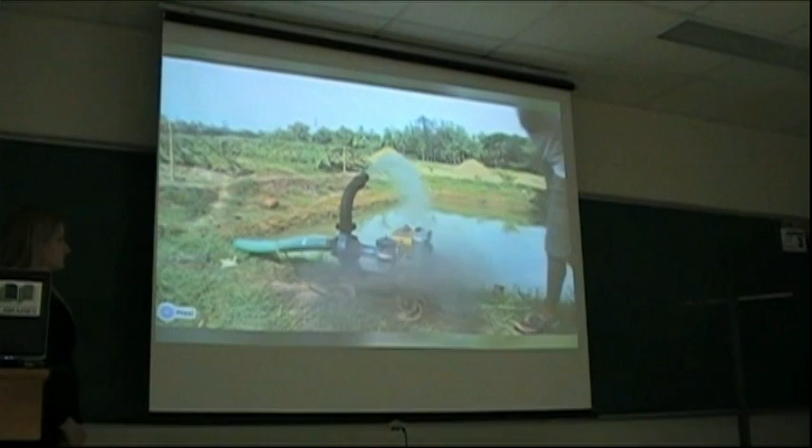Diesel pump is very expensive. The diesel pump pollutes a lot, it consumes a lot of diesel. A treadle pump is used for about 1,000 hours a year, and it saves up to half a ton of carbon dioxide.

As well as its environmental benefits, the treadle pump has had a huge impact on the rural poor. The reason they are poor is because they don't have access to irrigation. If you don't have access to water, you cannot farm. That is the difference between a rich and a poor farmer. Modern day technologies do not work for smallholder farmers.

Since winning the Ashden Award, IDEI and its founder, Amitabh Sadangi, have gone from strength to strength. To this day, we have sold 750,000 pumps. This means that it has improved the lives of between 3.5 and 4 million people. We call it the golden egg-laying goose.

Awards and investment have followed in quick succession: $27 million from the Bill and Melinda Gates Foundation, a major carbon finance deal from Climate Care, and a $1 million investment from the Acumen Fund to help sell treadle pumps and drip irrigation systems around the world.

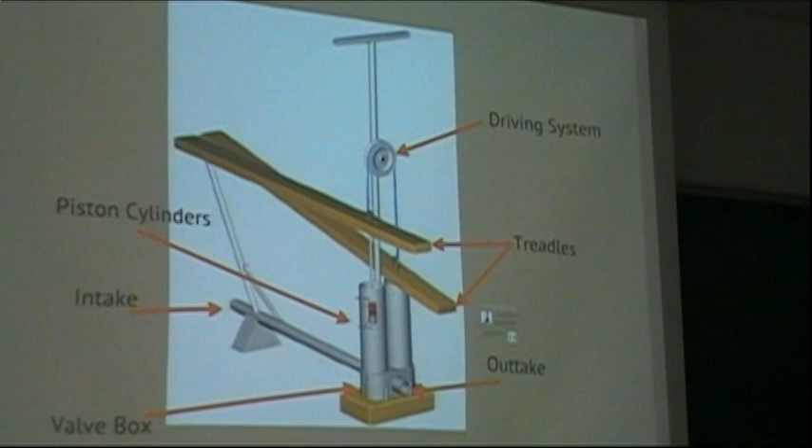Alright, let's look at the treadle pump design. When we started looking at it, we found it was composed of about 7 main components. The first is the driving system, usually made up of a rocker arm or pulley system, used to drive the piston cylinder arrangement. It has treadles, which the user steps on, kind of like a Stairmaster to operate it, plus an intake and outtake for the water source.

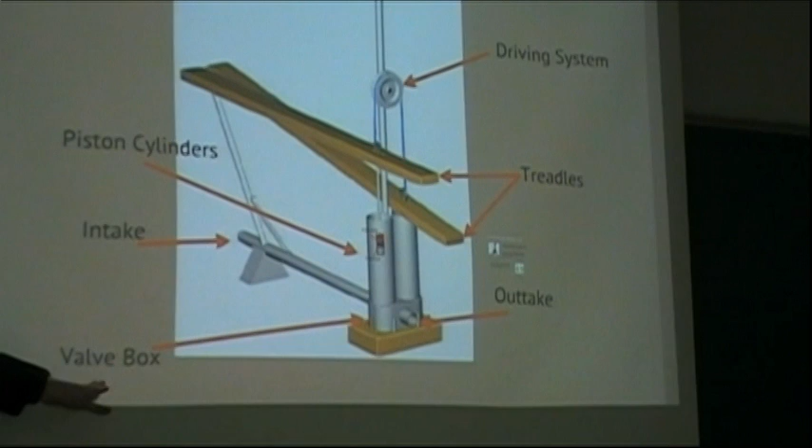We have a valve box here - some sort of valving system, doesn't have to be a box, but some system preventing the backflow of water so the pump can work efficiently. Inside the piston cylinder, you have your piston shaft, which connects to the drive system, and your piston seal, which actually creates the suction within the cylinder.

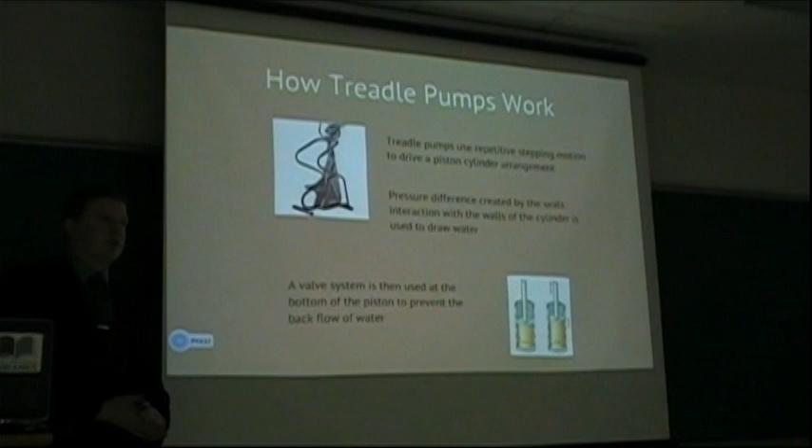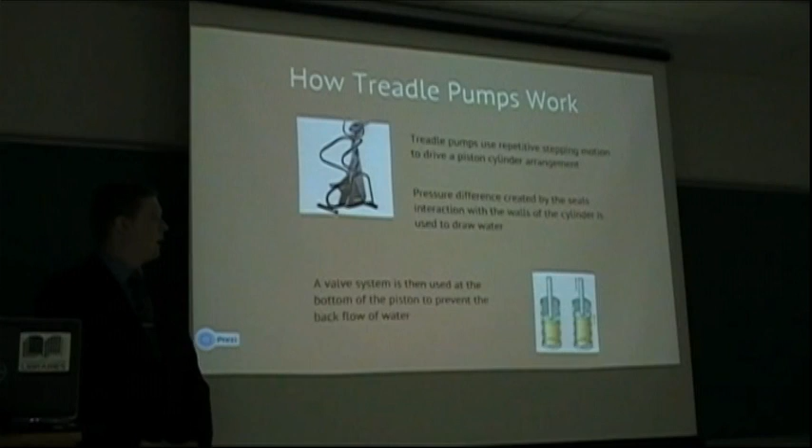So basically, treadle pumps work very similar to a Stairmaster. They use repetitive up and down motion to create suction between the seal and the cylinder wall. This pressure difference allows you to pull water from the ground up to 7 meters. As mentioned, a valve system is typically used in treadle pumps to prevent the backflow of water, so you're not doing redundant work pulling water up just to push it back down with the next treadle.

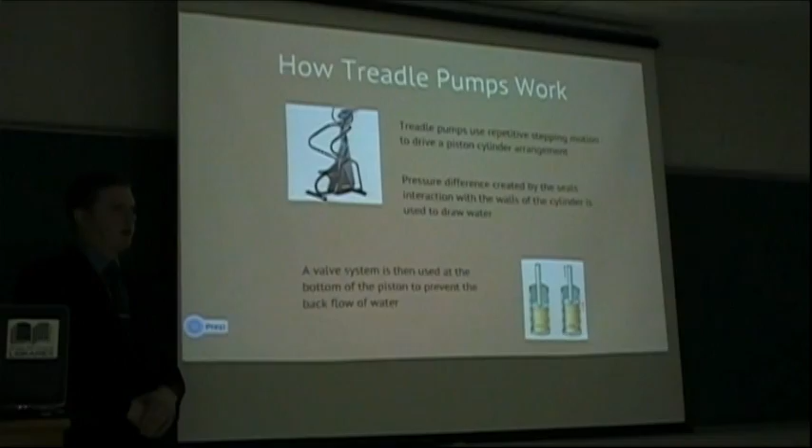Okay, so an important part of our project was our benchmarking study. The objective of our benchmarking is to find and implement some good ideas that we can use to improve our prototype performance.

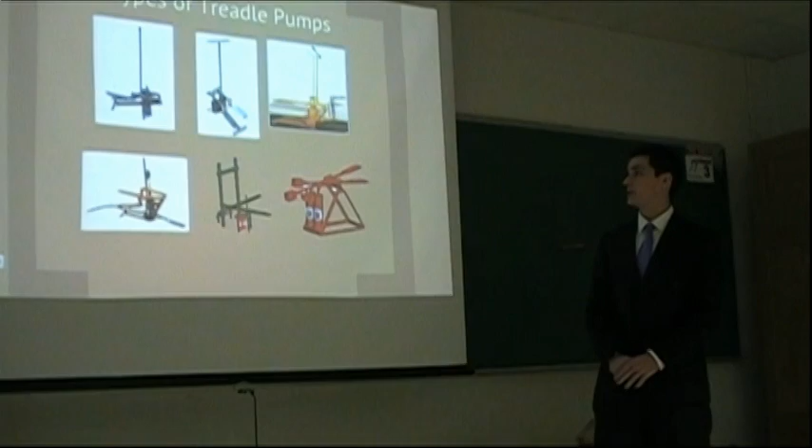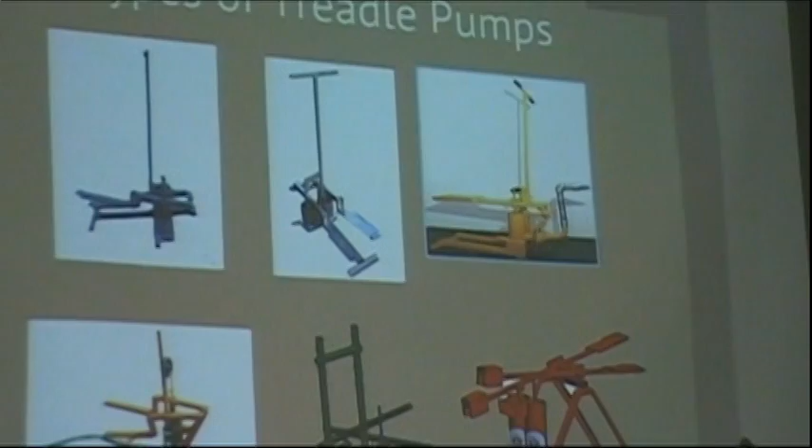So here we have some pictures of the different types of treadle pumps we looked at for our benchmarking. The first one is called the Super Moneymaker. It's produced by a company called Kickstart. The two next ones are different designs of treadle pumps. This one actually uses a pulley to drive the system.

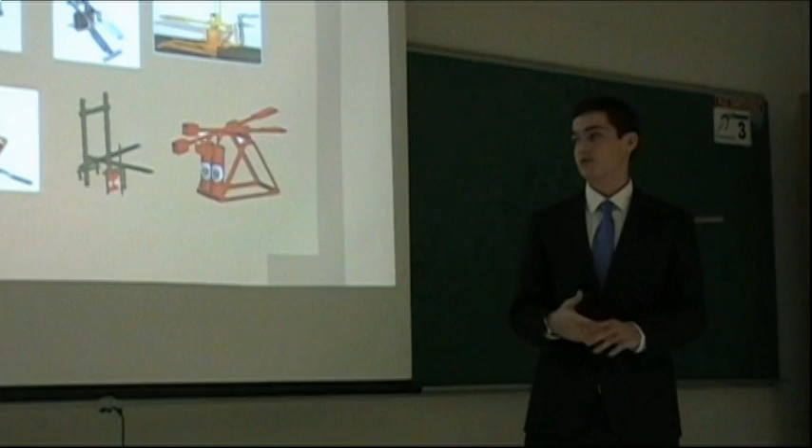This one is actually the one that you saw in the video. People can actually buy the pump itself and build the frame with any available material like bamboo or something like that. And this one is just another example of a different design of treadle pump without the handlebar.

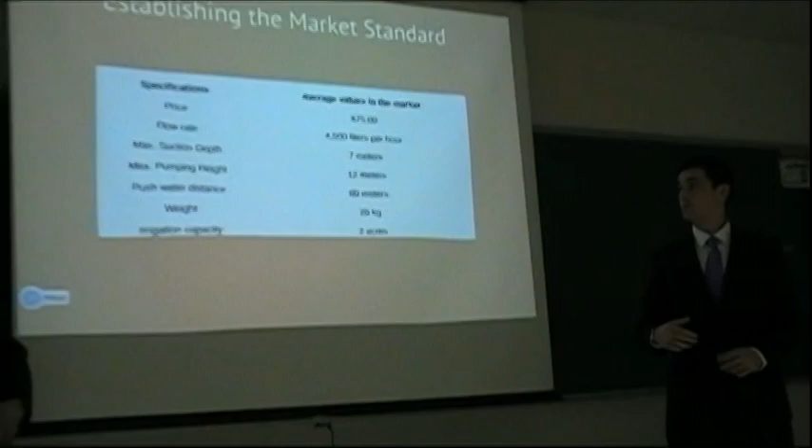So with that benchmarking data, we have this table here showing the main specifications of a treadle pump and the average values in the market.

So you can see that a treadle pump has an average price of $75, and an average flow rate of 4,500 liters per hour, which is about 20 gallons a minute. They have an average weight of 20 kilograms, that is about 44 pounds, and irrigation capacity of 2 acres.

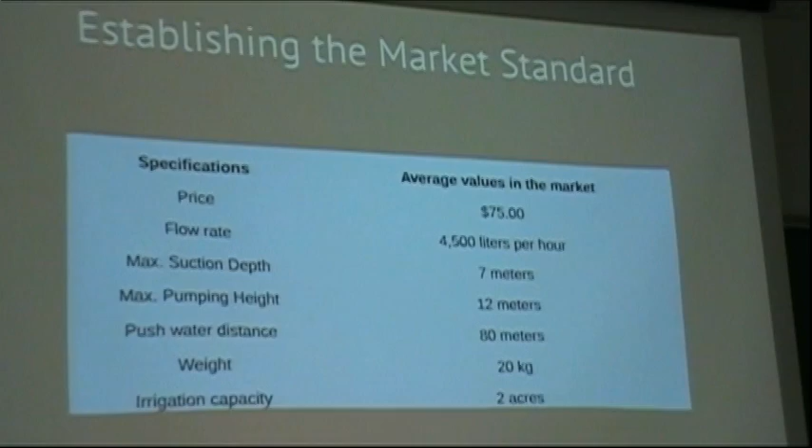This data was important for us because then you can compare our results with what they have in the market today.

So now I'd like to introduce you to our actual project. For this project, we partnered with the Appropriate Technology Collaborative. They're a non-government organization, and their goal is to produce sustainable technology that will give people in developing countries the chance for socioeconomic growth. They actually already had a pre-existing ATC design that was produced by a student group a couple years ago, and their main request for this was for us to bring this closer to the market standard that Felipe talked about earlier.

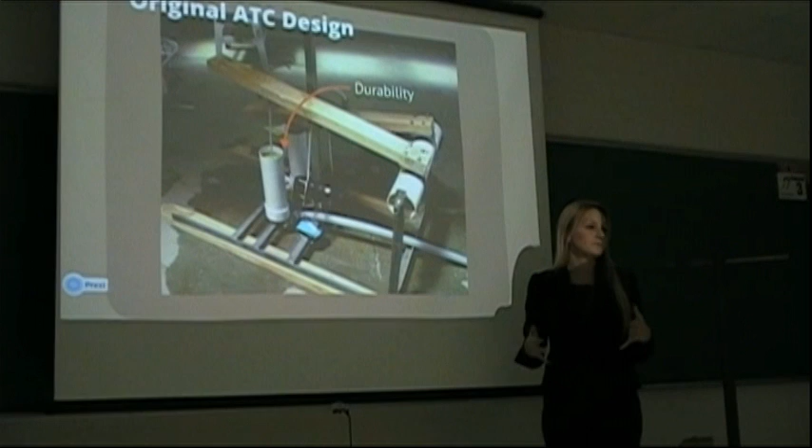Some main components they wanted us to improve is the durability. The durability is really important for a treadle pump, especially since we learned that maintenance in a lot of developing countries is not done. So if a pump breaks, most likely it'll be discarded and is no longer useful.

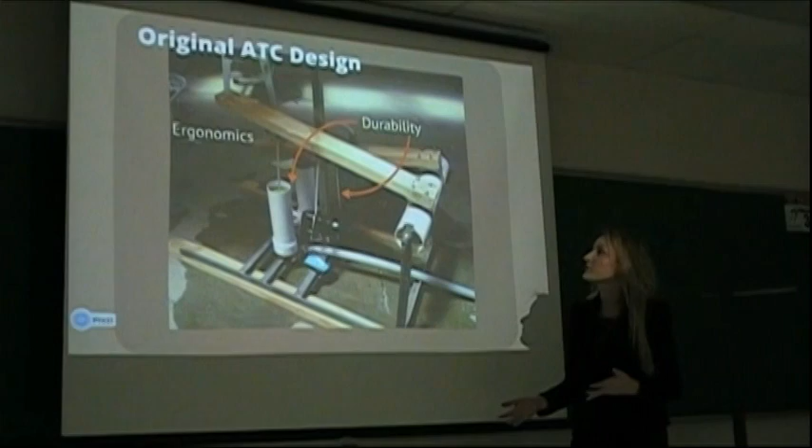Also, if a pump breaks, they can't afford to replace it. It's a pretty big investment for them living on $1 a day. Durability can be affected by replacing the PVC and also by looking into these wooden rocker arms.

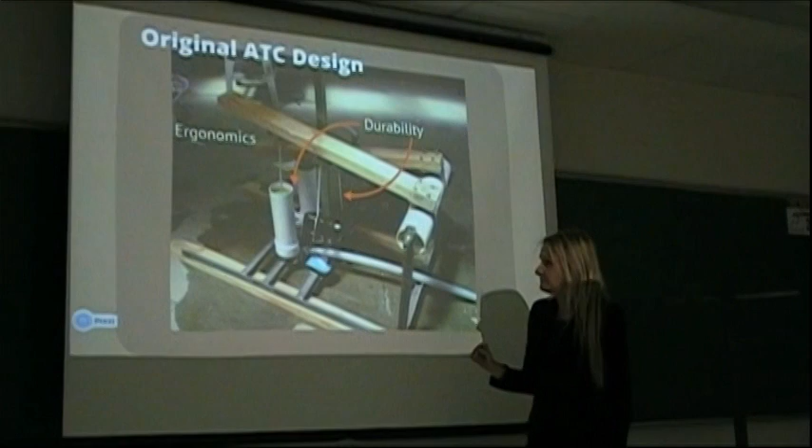Those aren't very strong. They then asked us to look at the ergonomics of their pump design. As you can see in this picture, and then also in this physical model that we have, the height that the operator would have to be is about 3 feet off the ground, which is not very safe and it's kind of awkward for them to operate.

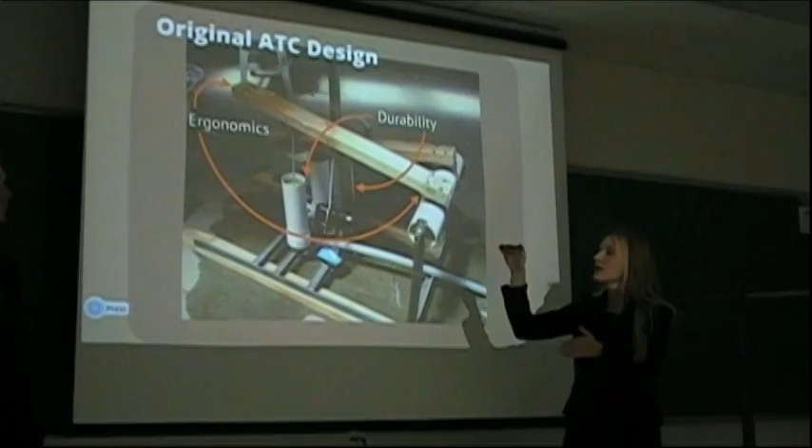Also, the connection to the pivot system isn't quite tight enough to make those treadles purely go up and down. There's some side-to-side movement, which also interferes with their operation of the pump.

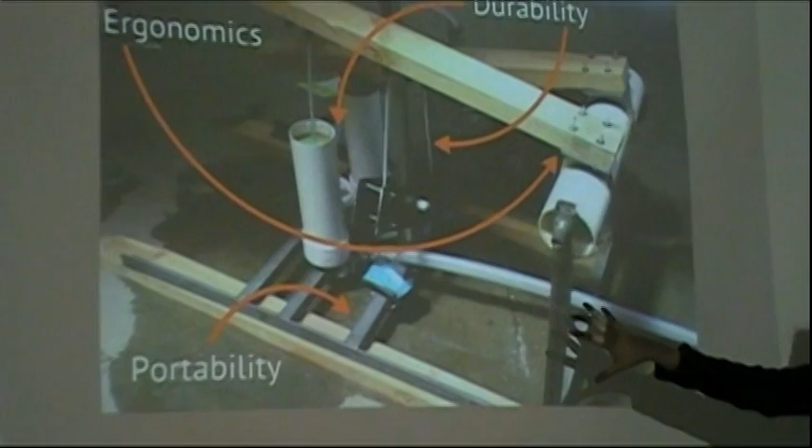They also asked us to improve the portability. As you can see, the current frame is made out of steel, and it's one big size that you can't break down. It's set to this size, and you couldn't imagine putting that on somebody's back and carrying it to a different field or bringing it from a main city into the field that you want to use it.

And lastly, they wanted our pump to be buildable in developing countries.

So, using what they gave us, we built a list of key design specifications. As you can see, these encompass the ideas that they had wanted us to address.

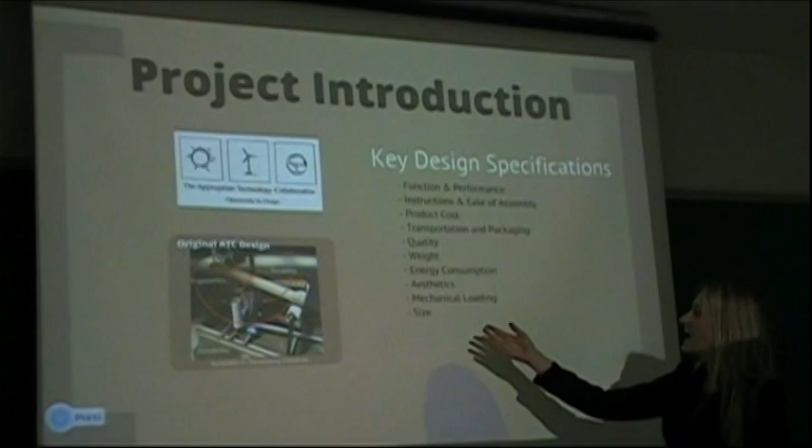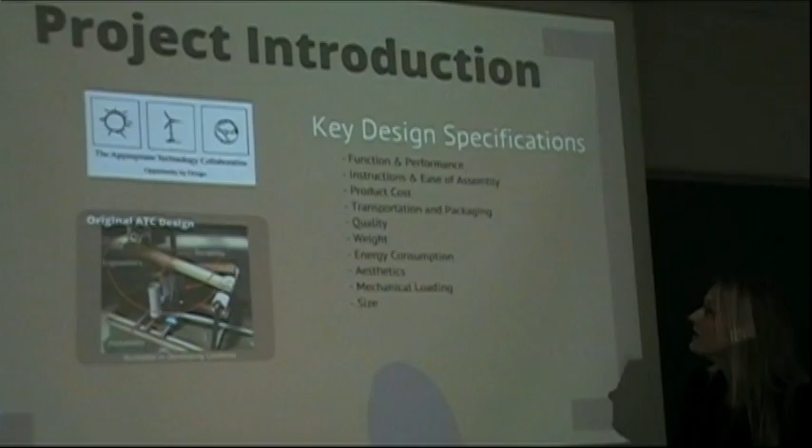Size and weight obviously will affect the portability. Things such as energy consumption, aesthetics, and mechanical loading are all factors that relate to the usage of the consumer. And then function, performance, and quality also relate back to the durability.

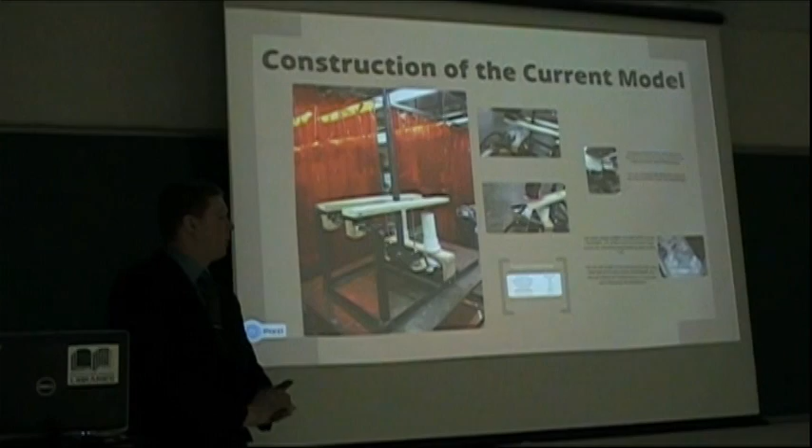So we decided it'd be useful to actually construct this model that was already previously existing. As you can see, it's up here in the front of the room, and you'll have a chance later to come up and take a good look at it. But we have some interesting video of myself working the pump.

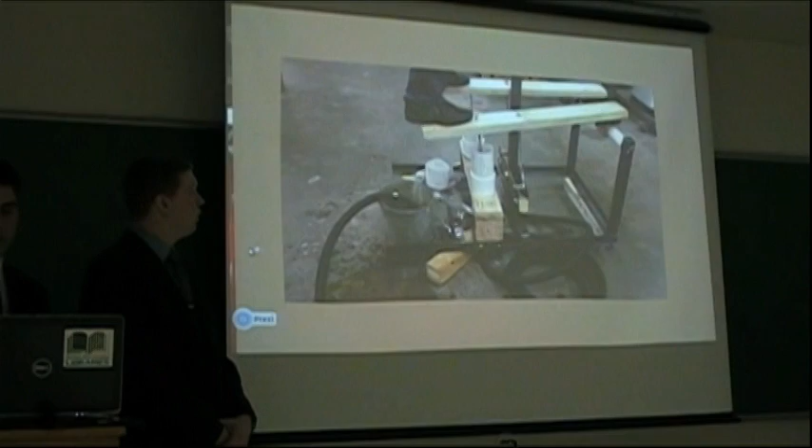As you can see, I'm pretty high in the air, about 3 feet, like Ann said, and I can operate it pretty smoothly. It draws some water, but not a whole lot, partially due to the valve system that was used. It's kind of hunched over the handle at the top, so it's not the most comfortable thing to use. It gets water pumping, but it could be improved on.

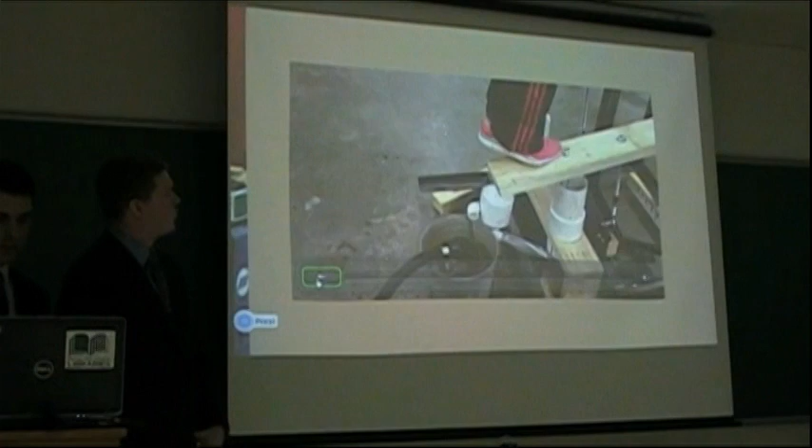So we have another video here, a little bit more interesting. This is Ann trying to pump the pump, and as you can see, it's very difficult for her to get it moving. Ann's a lot more realistic to what the demographic and population in India is going to look like as far as size. So if it's this hard for Ann to use it, it's going to be unrealistic and hard for people elsewhere to use as well.

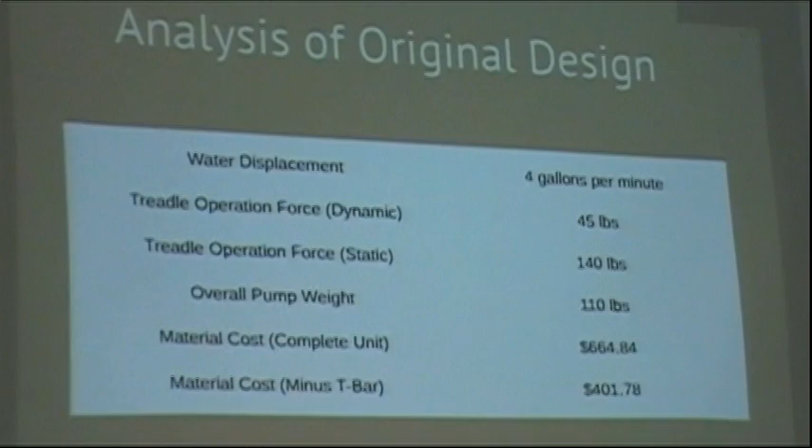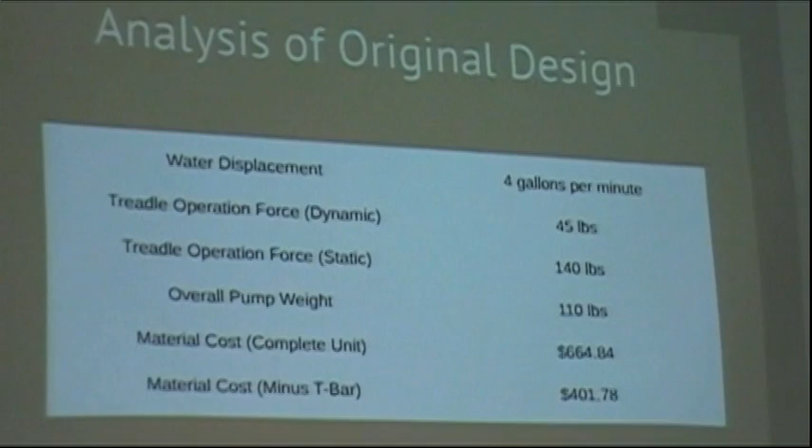Here's some analysis of the original design we took. It moved about 4 gallons per minute, and that was not pumping any water upward or pulling any water, just cycling water at ground level at about 4 gallons per minute. It took about 140 pounds to get the treadle operating from its static position, and once it was moving, it was more like 45 pounds. That initial 140 pounds to get it moving is more than a lot of people in India even weigh. Obviously it's very heavy, and it was extremely costly to build.

So kind of building off what both Ann and John talked about, we really wanted to concentrate on DFM after constructing this model. In the booklet we used to construct it, there were a couple of steps that were just missing. We were able to figure those out and go from there. Specifically, that had to do with fasteners—we wanted to reduce the number of fasteners in the design to make it as minimal as possible, as well as the ergonomics that they both touched on.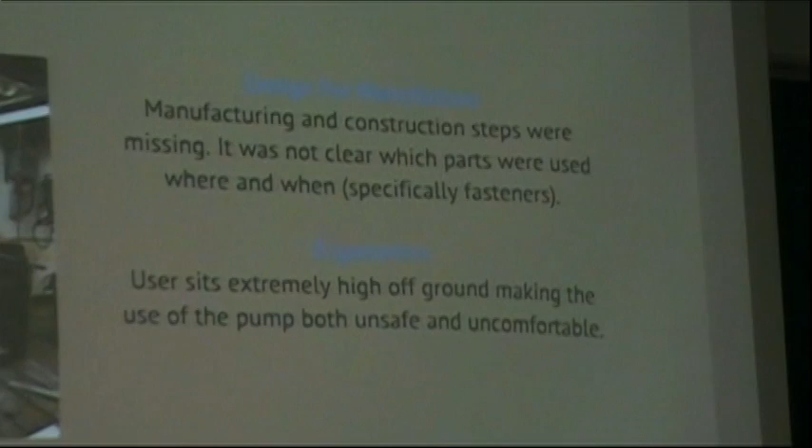You're very high up while operating this, which leads into safety concerns as well as just how comfortable you are while using the product. As a consumer, you want to feel comfortable using your product that you're going to be using for hours on hours on hours.

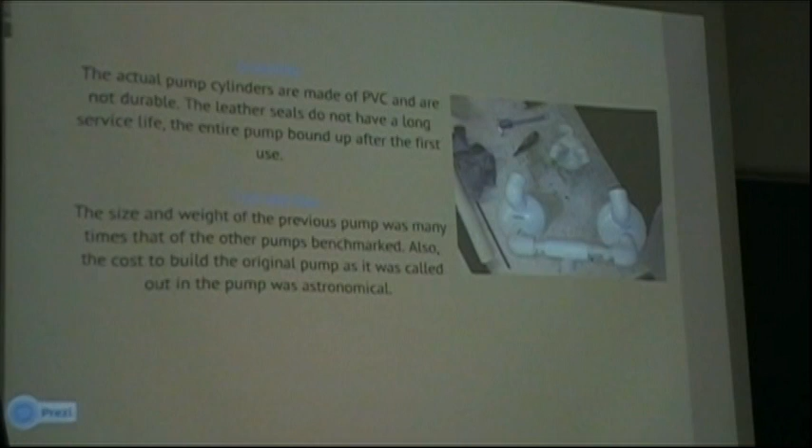As well as the durability—we found that PVC was not the strongest material, had a lot of flex to it. We felt it wouldn't really last too long out in the field in the elements. John also talked about the cost, which was based on American prices at your local Home Depot. That's going to be much greater than prices you'd see in foreign countries, as long as you're even able to buy the necessary materials there.

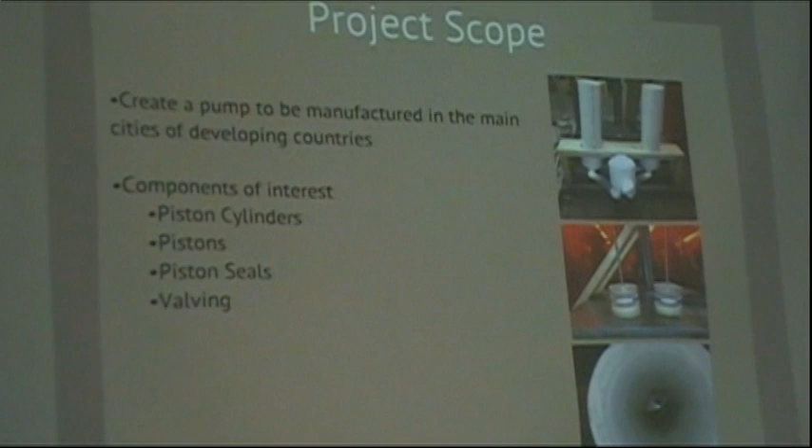So with the experience we got by building the original design, we went to our design phase. Our project scope began by defining two different topics. The first is to create a pump to be manufactured in the main cities of developing countries like India or Guatemala, for example. After our meetings with ATC and during the course of our project, we found that the areas we wanted to improve were the cylinders, pistons, piston seals, and the valving.

You can see the pictures over here. The first picture shows the pump housing with the 2 cylinders and what we call the water chamber. In the second picture, you can see the pistons and the piston seals made of leather. And in the last picture, you can see the valve system in the bottom of the cylinder—basically a piece of rubber that allows the water to flow in just one direction.

So we'd like to take some time to walk you through our thought process when we were designing each of these components. We'll go ahead and start with the seals.

Seals looked at several different materials and types. As we mentioned, the ATC model used leather. Do you want to pass around that piece of leather for us real quick? That is the material they used to build their seals. You can tell it's pretty rigid, pretty thick. It's hard for us to acquire, and because of that, we'd also think it would be hard for people in developing countries to acquire. Some downsides to leather are its durability and its actual attainment.

The leather does have positives, such as a low coefficient of friction, and it swells when you add water to it. So it's often used as a seal material in a lot of pumps.

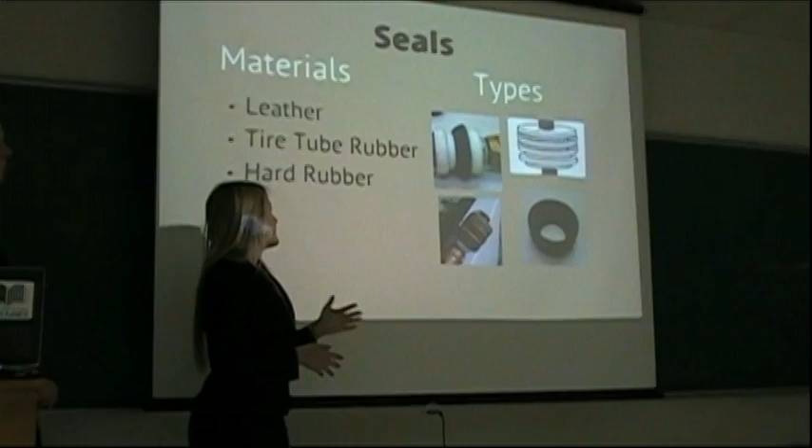We also looked at tire tube rubber. We found out that tires are incredibly available in a lot of developing countries, so we wanted to consider using that rubber in our seal. Finally we looked into hard rubber. Hard rubber would be nice because it's solid, and we think it would really help with the durability of the seals. The only drawback is that it has a higher coefficient of friction than leather.

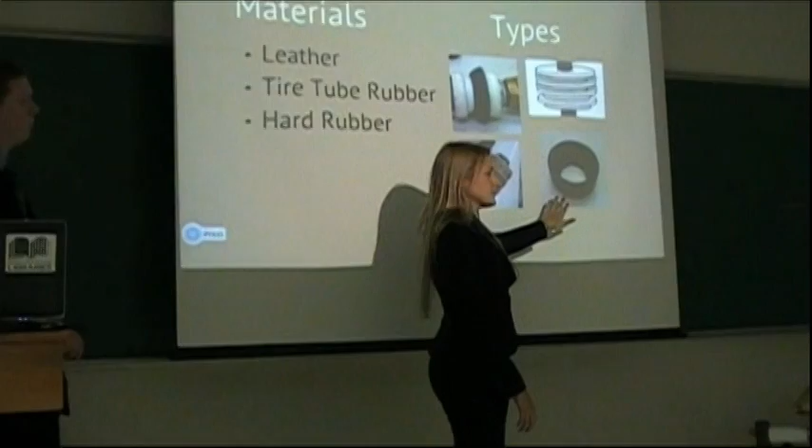Types of seals we looked at: U-seals, piston rings, labyrinth seals, and cup seals. Cup seals are what ATC used in the original model. Benefits of labyrinth seals and U-seals are that they're completely independent of friction to seal the pump—they depend more on flow and pressure drops. These two typically depend on friction.

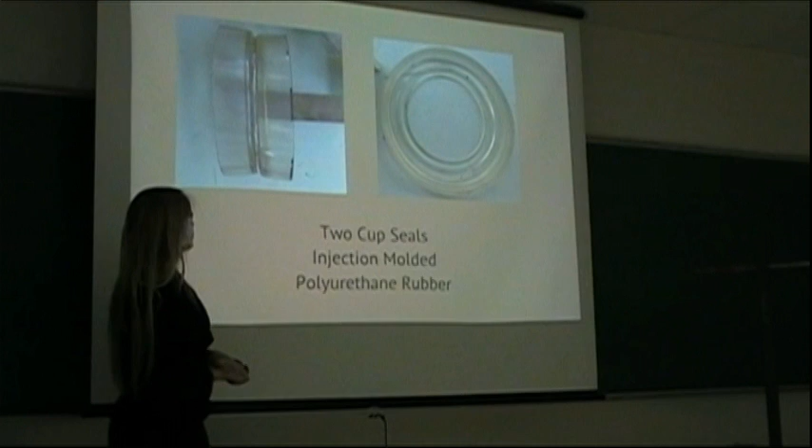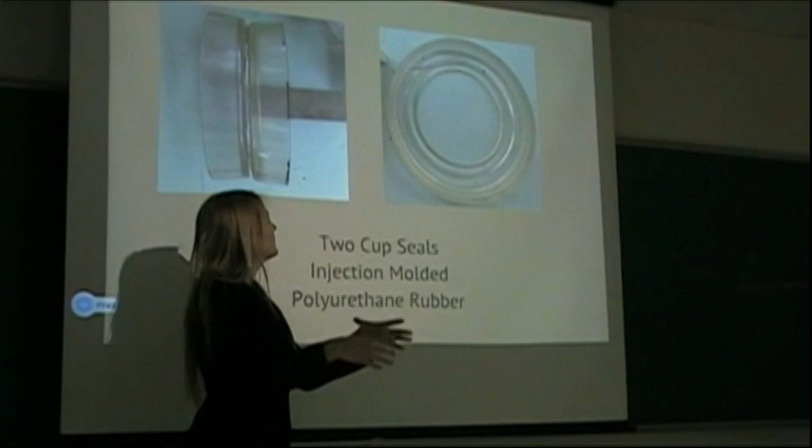We made a modification to the cup seal for our final design. We decided to use hard rubber, and made a 1 millimeter tolerance from that seal to the cylinder so it wouldn't rub against the sides and would flow freely. Because of this, we had to create a seal around that outside edge, so we had a small hole within the piston body that would allow some water to flow up, and that would in itself seal the seal.

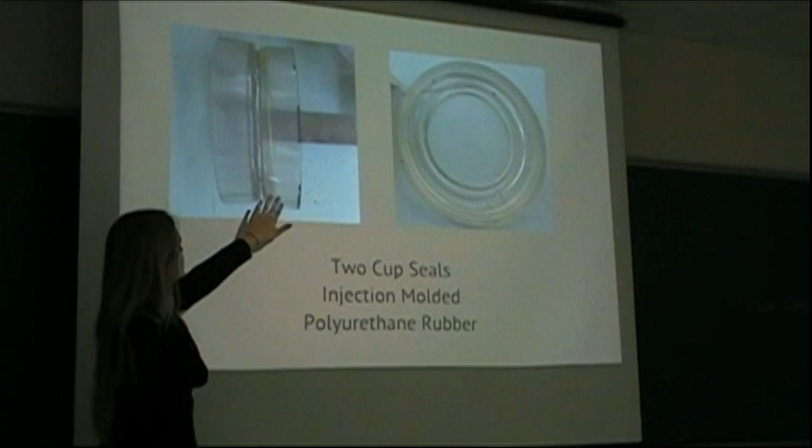So this is the basic two-seal configuration, which resembles what ATC had, except we stepped it up to using metal and rubber. The rubber would be injection molded polyurethane, and we know that injection molding is pretty available in main hubs of developing countries.

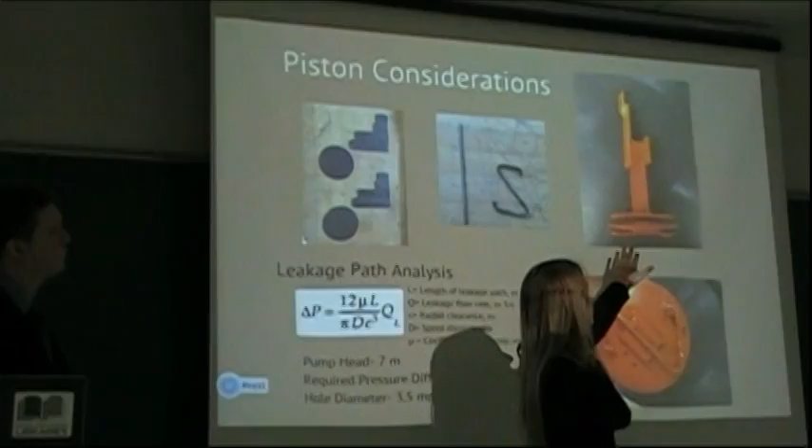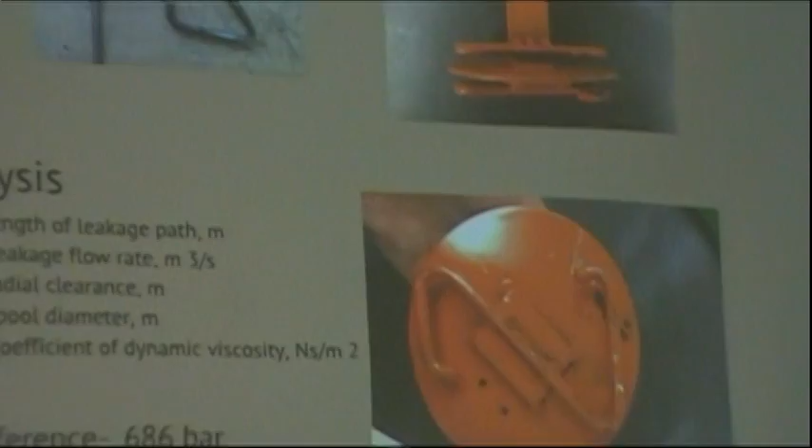Moving on to the pistons, a really big consideration when designing pistons was design for manufacturing. As you can see, these are the parts we used for the actual piston. This is all the same bar stock, just cut to different lengths. This shortest piece was put on the underside as a spacer. This piece is meant to secure the seal in place, but still allow for easy removal of the seals in case you need to replace them.

The one consideration we really had to focus on for the pistons is the actual calculation of the leakage path that would still allow us to attain the market standard of 7 meters of pump head. With a simple leakage path analysis, we came up with a hole diameter of 3.5 millimeters.

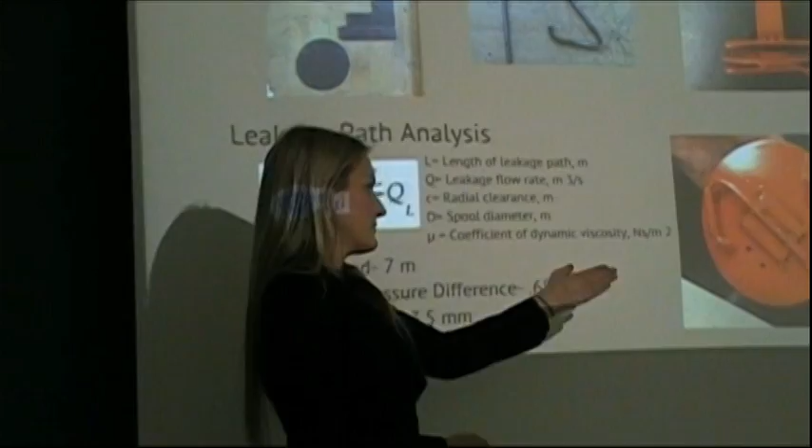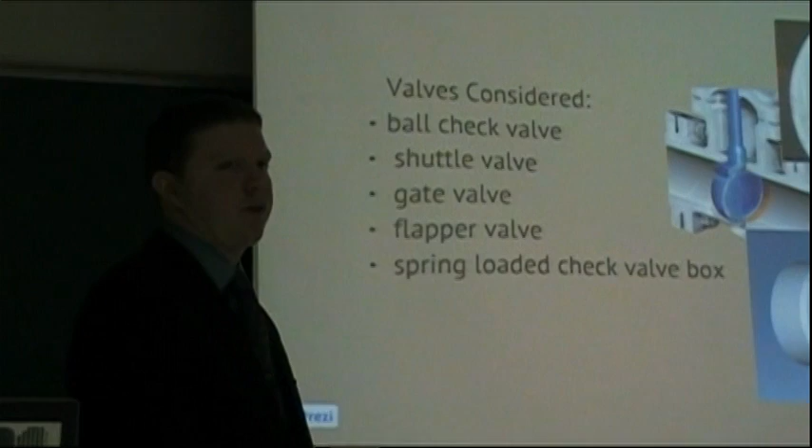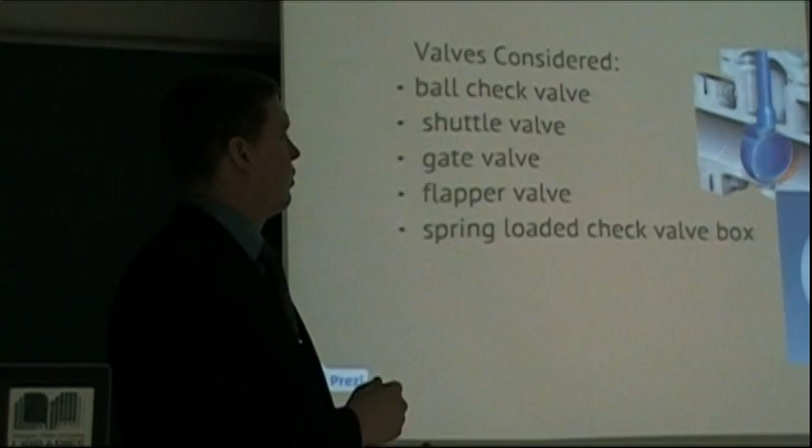All right, so the next topic we considered improving was valves. A few different valves we looked at: ball check valves, gate valves, shuttle valves. Some of the more interesting ones, shuttle valves, were actually brought to our attention by somebody we consulted for information—he thought they could be used in shuttle pumps. For our design, we were looking for something functional, easy to use, and reliable, so we stayed away from that.

Other options: the flapper valves, pictured top right. Like we said, that was one currently used, and it had some problems with not sealing well. Basically, the pressure generated by the pump was allowing water to seep past that valve. That's why you can't get a good, consistent pump of water in those videos we watched earlier.

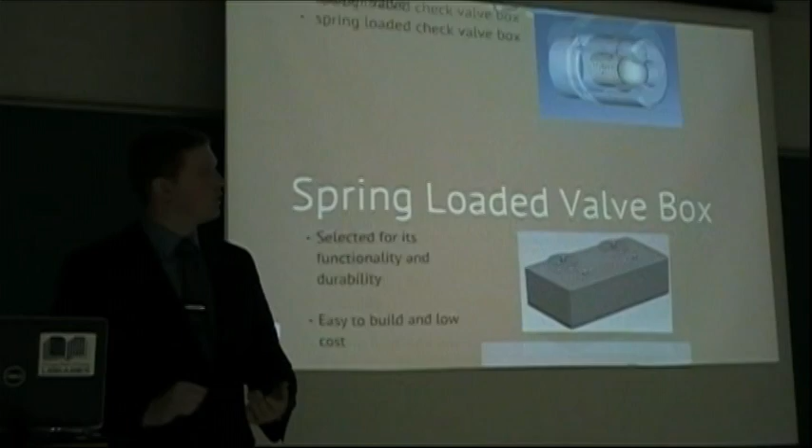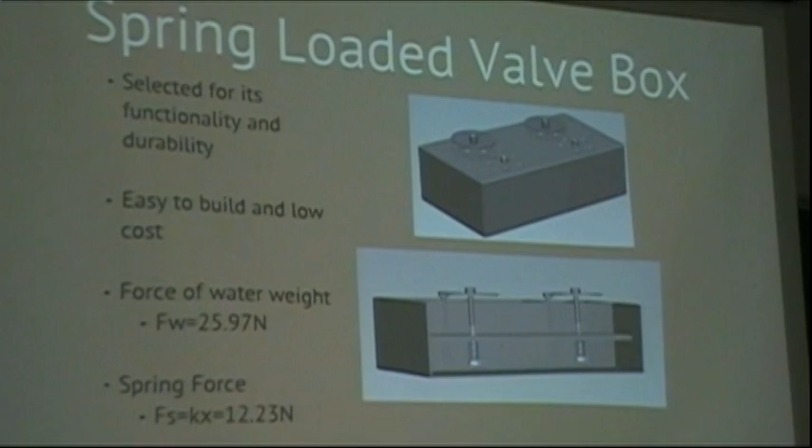Ultimately, what we ended up going with is the spring-loaded check valve box, which has many uses. It was selected for functionality and durability—it's easy to manufacture and low cost. We're going to pass it around. We took the idea from a check valve, a brass check valve you'd see in a standard plumbing configuration. It basically uses a spring and a nut with a bolt and a washer on top.

And what that does, you have 2 in and 2 out valves, one for each cylinder, and it allows the water to not backflow when you're trying to pump. And that there is actually a sample of a valve box.

Be careful passing it around, it does have some sharp edges on it, so that was a prototype that we built, but it's basically the inside of what our valve box looks like.

Here's a computer drawing up on the screen, that's a CAD version of it, but we had some calculations on the spring that we would need. Obviously, we couldn't just put any spring in there. It needed to be durable, and it also needed to be able to open.

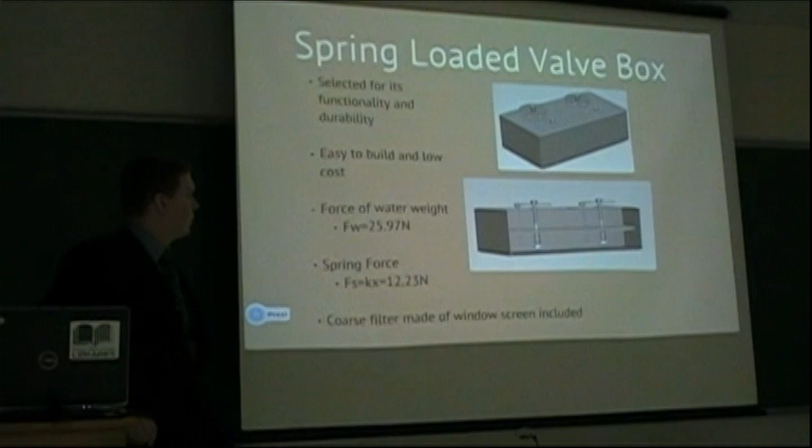We didn't want to put too strong a spring in there. Our valves wouldn't open, we'd have a problem, we wouldn't pump any water. Or the spring wouldn't hold the seal. So a little bit of delicate calculation there as far as picking just the right springs.

Also with the valve box, we were able to incorporate a filter into the valve box, and basically what that does is it prolongs the life of your seals. It keeps rocks and grit and sand out of the pump, which increases our service life. Maintenance isn't really done, as we've already said, so any increase in the life of the product is good.

The cylinders, these are finished product cylinders, sitting on top of the valve box.

It's interesting what we added to the cylinders, that path on the top of the cylinders. It allows water to travel back and forth from cylinder to cylinder, so when the piston comes to the top of one cylinder, the water flows over to the other one and fills it. That helps with a couple things.

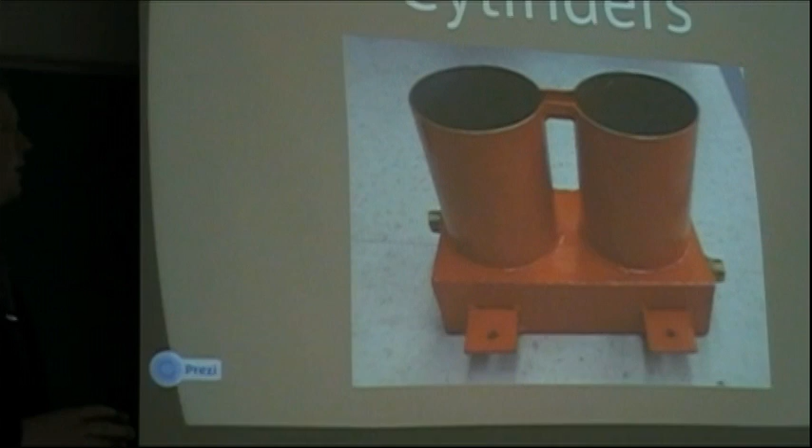It helps with keeping the seal around the piston while the pump is moving, and it also helps keep it easy to move in there. It doesn't bind up because of friction as much. So, an interesting little adaptation that we saw on some other treadle pumps in industry, so we decided to use that in ours.

Also, a lot of pumps used a large intake, where you had to put a large piece of reinforced hose in order to get the water to flow. Our valve box, as you can see, uses just a standard 5/8 inch garden hose. It was easier to use and more readily available than a large 1.5 inch or larger diameter hose.

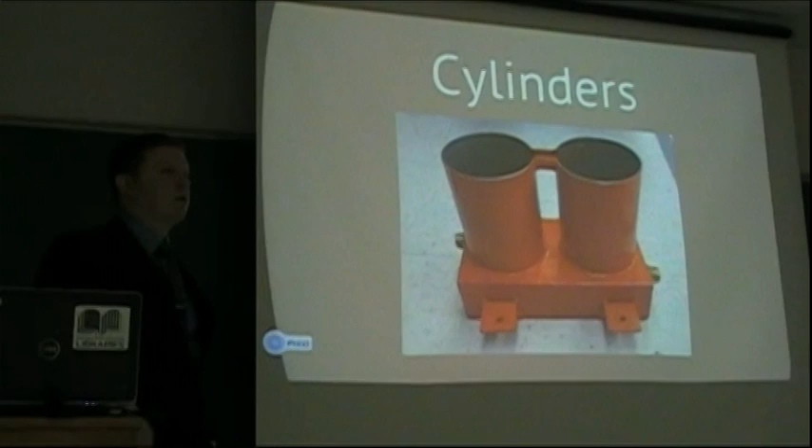Okay, and so even though it was outside our actual project's main focus, we still felt it was appropriate to come up with a treadle frame as well as a treadle concept. So what you have here in the top left is our actual treadle frame, as well as right in front of you. We used wood as much as we could, since we felt that was readily available as well as replaceable. In the earlier video you saw that it could also be constructed out of something like bamboo.

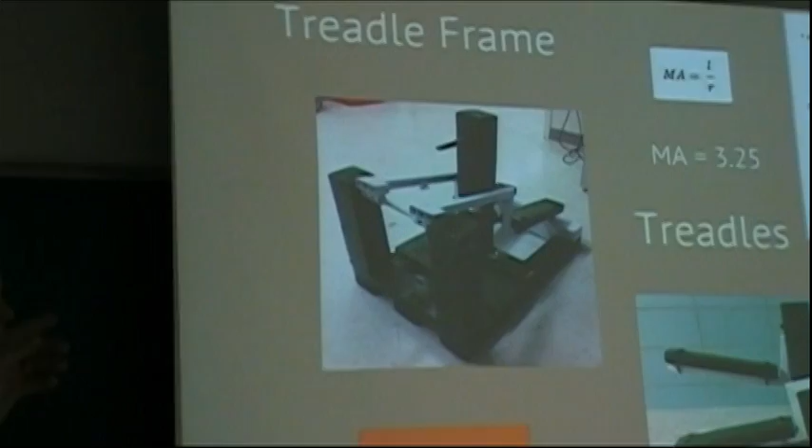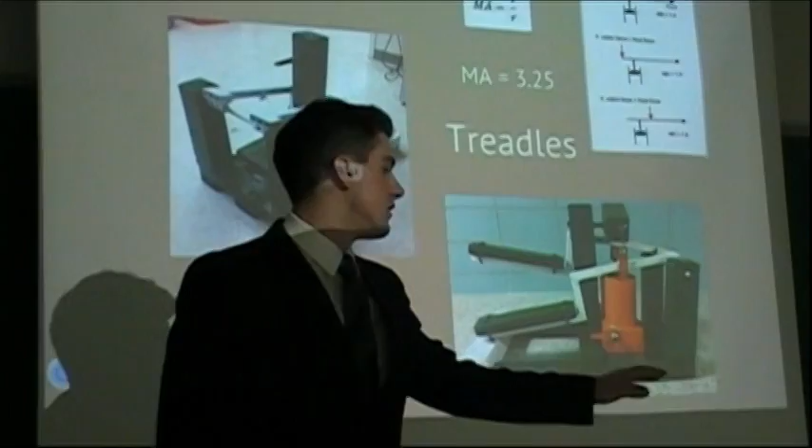Going from there, you can then see our treadles. We wanted to look into ergonomics with this design, which is why we ended up putting about a 6-inch drop in the treadles. That was to help combat some of the issues we saw with how high the user was on this model.

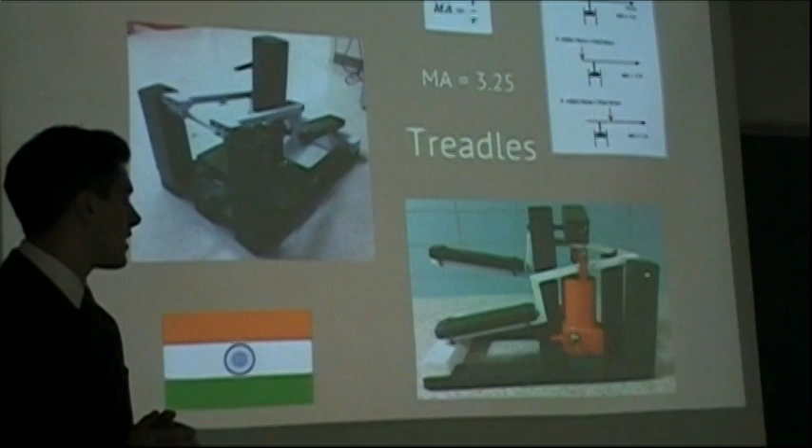As well, you can see that the aesthetics of the unit were based off of the Indian flag. We felt that would help with the diffusion of this product, and that it would make people want to use it, want that model.

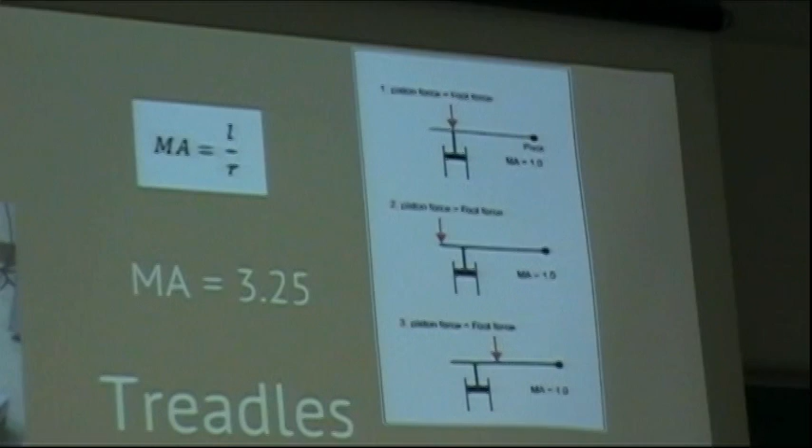In the top right, you can see our calculation for mechanical advantage, which is the actual force you can gain by using a levered device. With our model, option number 2, that is taking the length of the overall treadle and where the user would put their force down, divided by the actual distance from the fulcrum to where the piston force is. We had a mechanical advantage of about 3.25.

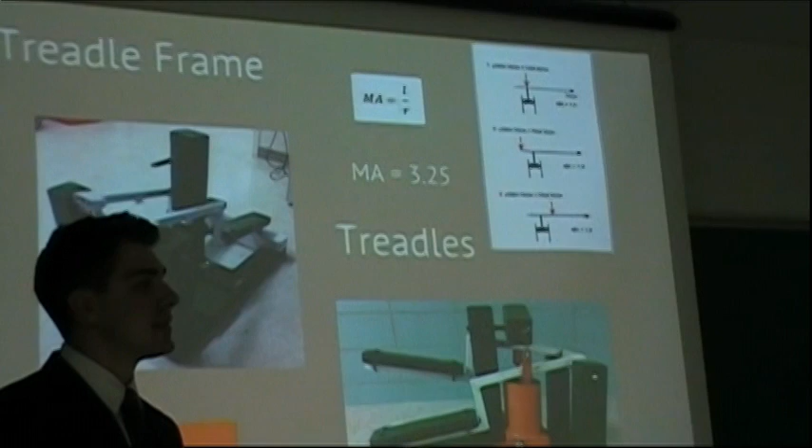That's 26 inches divided by 8 inches there. So that allows the operator to get 3.25 times their weight of force on that piston, giving them a larger head of pumping as well as moving water a further distance.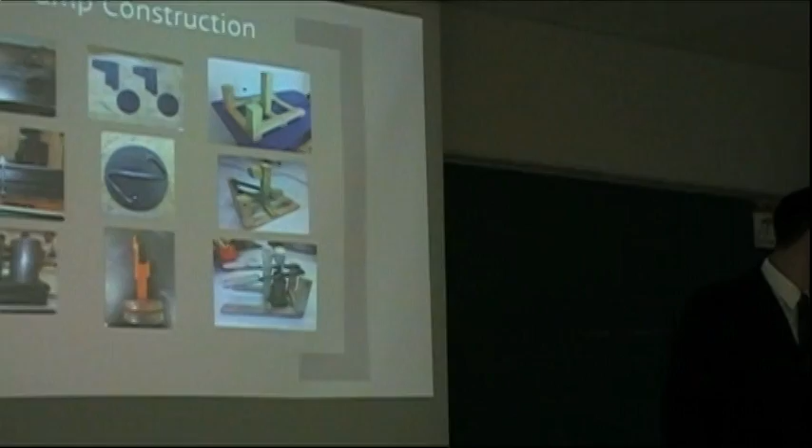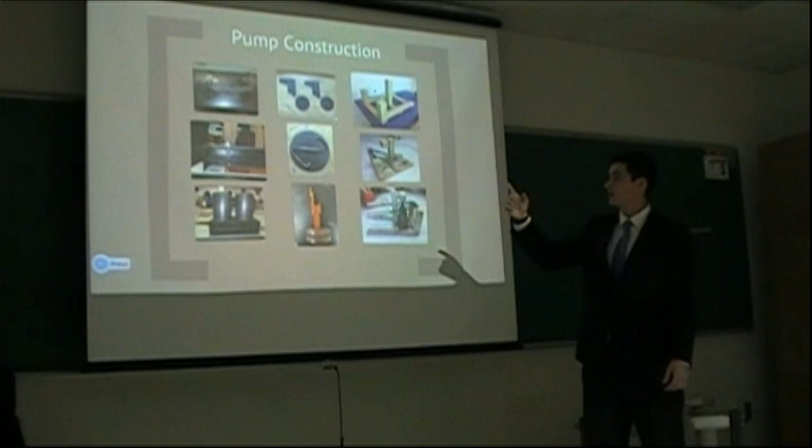Right, so here you can see some pictures of our pump construction. On this side you can see the pump housing and the valve box. The first picture shows the in and out valves, the second shows the check valves mechanism, and the last picture is the pump housing basically done with the cylinders welded in the top of it.

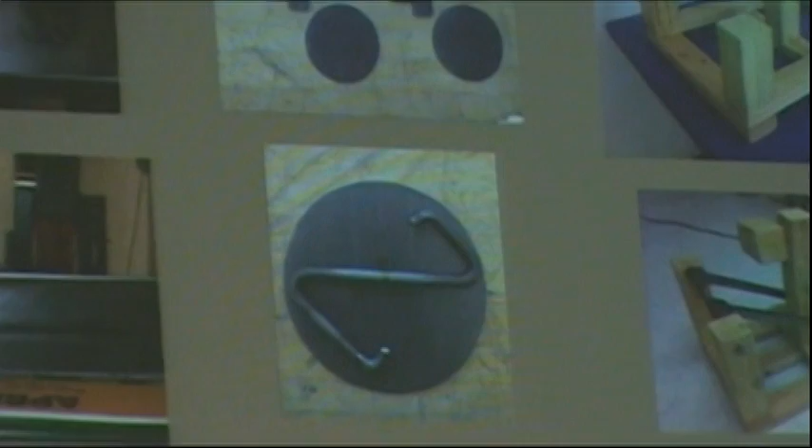In the center you can see the work we did with the pistons. The first picture shows the sheet metal used for the piston and piston plate. In the second picture you can see the Z, which is welded to the piston plate. It holds the seal in the piston and helps the user eventually change the seal. This picture is our piston, our final piston.

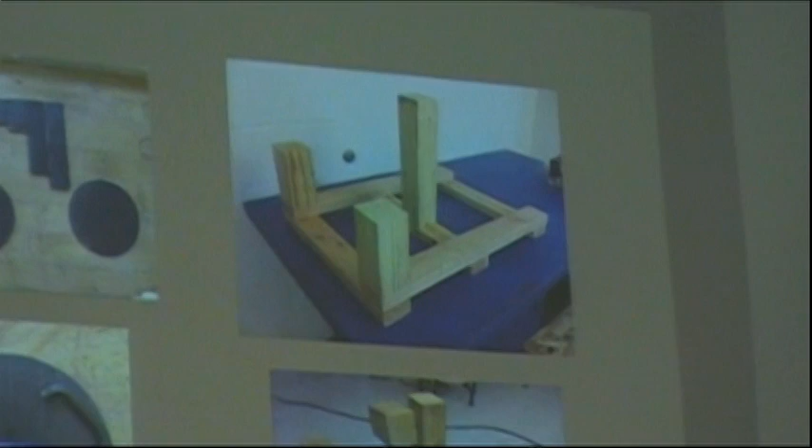And finally, here you can see our treadle frame. It's basically made of wood. In the second picture we already have the treadles attached and the rocker arm. The last picture is our pump basically done with the frame, treadles, rocker arm, and the pump housing.

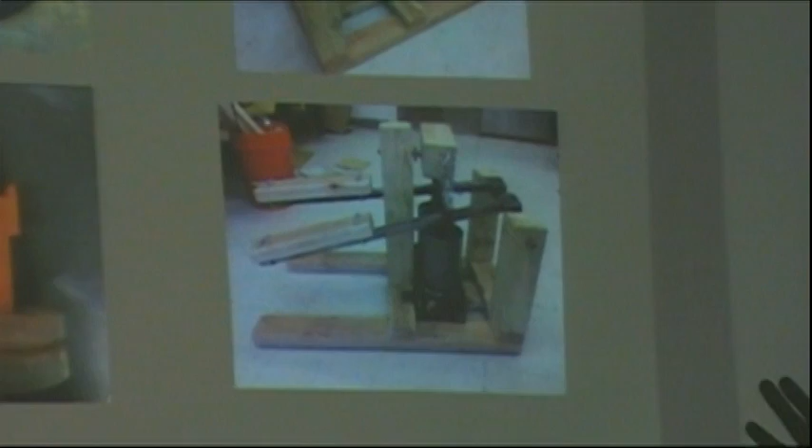Can you go back a little bit?

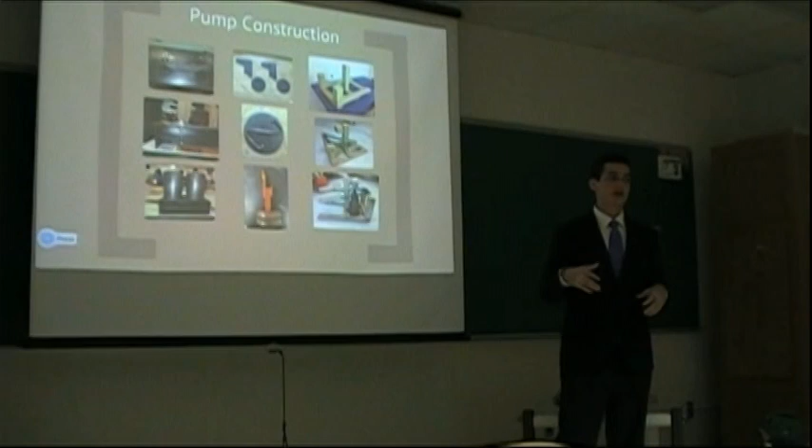During the whole process we wanted to document it as much as we can, because we are going to build our instructional manual after that. So we took pictures of all the steps, and we want our manual to be as explanatory as possible. We also tried to use the tools and processes that would be available in a developing country, so we basically used hand tools and welding.

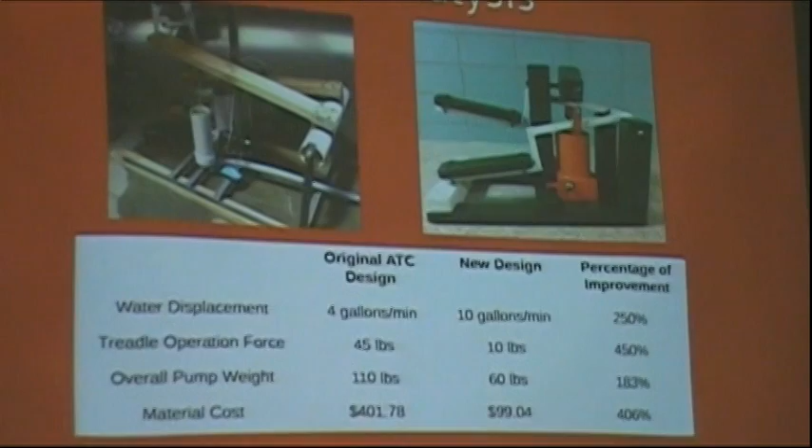So here's a picture of our final prototype, and after testing it we could compare it with the original design. Our new design has a water flow rate of 10 gallons a minute compared to 4 gallons a minute. That's a 250% improvement.

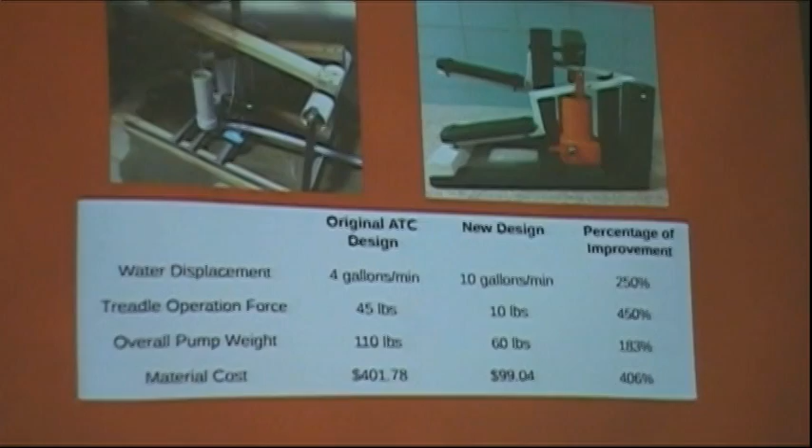We got a 450% improvement in the operation force and 183% improvement in the weight. We spent around $400 to build the original design, and about $100 to build our new design. That's about a 406% improvement in cost.

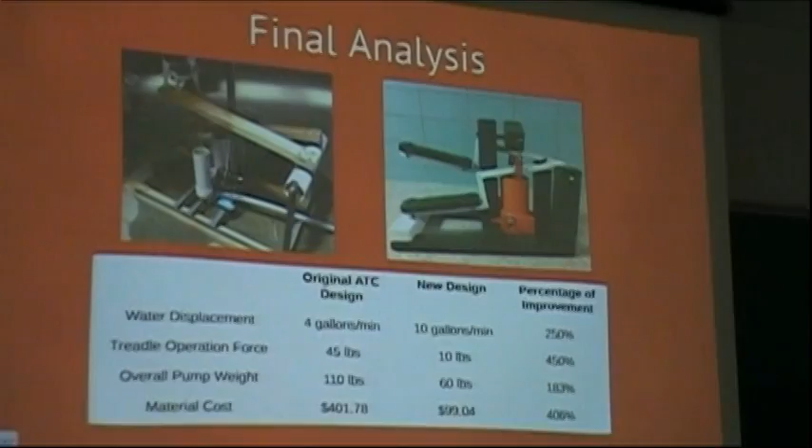So that detailed our process from beginning to end of how we achieved the pump that we ended up with.

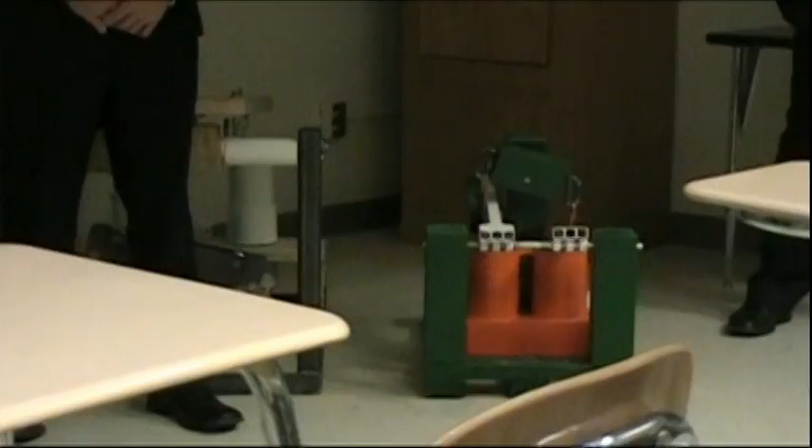Obviously the 2x4s and 4x4s of wood weren't the majority of that cost. I would say probably 60% of that cost was the actual metal that goes into it - metal tubing, bar stock, and sheet metal. We've also done a separate cost analysis of that orange piece alone.

That's what we would envision the manual accompanying, and that's what would be produced in the developing countries and main cities. The cost was around just over $50 for that portion, so about 60% of the cost went into that part.

Hypothetically, in a developing country, a farmer could use bamboo for the remainder of that pump and save themselves half the cost, or whatever materials they have available.

Is ATC going to use your improvements and pump design? We certainly hope so. They're sitting front and center here, so.

The original treadle pump, the large machine there, has been downloaded over 3,700 times and used as the basis of a design for a treadle pump thousands of times. This other one is so much better, so it will replace the set of drawings represented by the first pump with the set representing the second pump. We expect to get greater traction with it, so yeah, it'll get used.